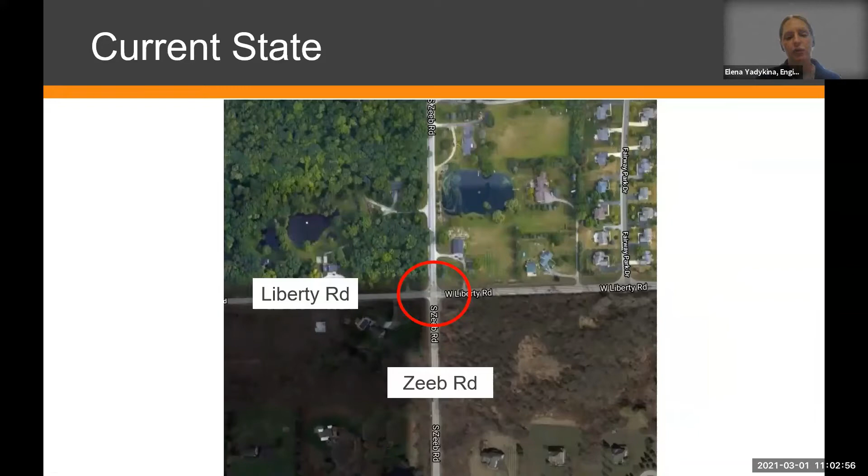We have a close-up for this intersection. Currently, it has 3 paved legs, and 1 leg is unpaved on the west side. It's a gravel road. And when we look at the ground, right now it's a 4-way stop control with a flashing beacon to warn people that a stop is required. As we can see even here, that location is busy and those volumes are increasing.

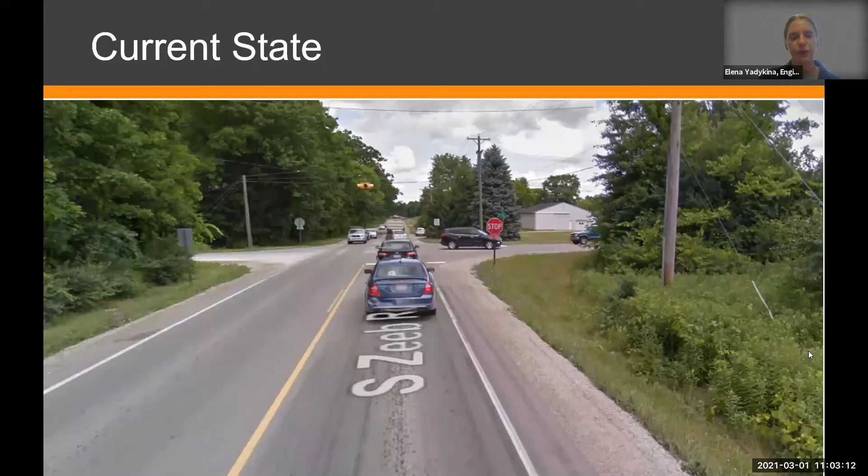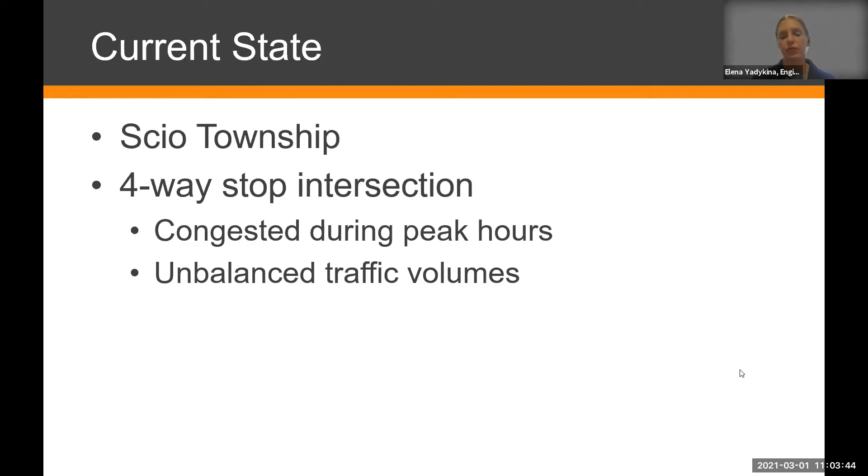When we talk about volumes, they continue to increase. Location is within Scio Township, and as I mentioned, it's a 4-way stop. We see congestion during peak hours, and we also see unbalanced volumes. We'll talk about it a little bit later, but at some locations we see approximately the same volumes on each leg. This location is different. Some movements are very heavy, while the rest of them are not so heavy. We'll talk about it later.

In terms of volumes, the ADT, or average daily traffic volumes, the 24-hour traffic volumes are very high. So we have thousands of vehicles traveling through that intersection every day. So these are 24-hour volumes. Zeeb Road has heavier traffic, but on Liberty also, we see 5,000 vehicles on the east leg of that intersection. So the volumes continue to grow, and with that, we see that this intersection needs to be improved.

We conducted a signal warrant analysis. That's something we do routinely for our intersections of primary roads that currently have stop control, 2-way or 4-way stop control. So we visit those intersections and we study, look at the volumes, delay, and crash history. We see if warrants are met for a traffic signal, and if they're met, to what degree. And we go back every few years to see how the situation is developing, if it's the same or the need for improvement is increasing.

So we studied the intersection of Zeeb and Liberty. We ran warrants, we looked at the volumes and all the other criteria, and we saw that even now, currently, the traffic signal warrants are met.

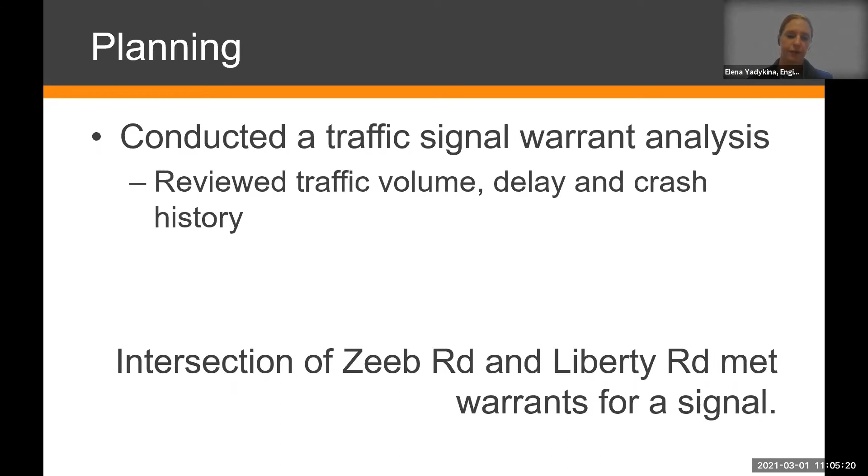Unfortunately, when we see those intersections, when those warrants are met, we can't go out and install an improvement next day, right? We need to plan. We need to think about funding, how to fund the projects, and typically those improvements are not cheap, a significant expense. We need to develop a strategy or plan what treatment a specific location will get.

Some locations will benefit from a traffic signal the most. Some other locations are more fitted for a roundabout. So we need to consider each location, because each location is unique. For the Zeeb and Liberty intersection, we also have some upcoming projects that will increase the traffic. It will impact this intersection.

We have a new residential development that is proposed to connect to Liberty Road on the east leg. We're also going to pave Zeeb Road to the south. This is the last segment that will connect Pleasant Lake Road to Ellsworth Road, and then provide a completely paved route for traffic to access Ann Arbor, Dexter, a north-south route to access I-94 and M14. So we definitely expect an increase of traffic due to those upcoming projects.

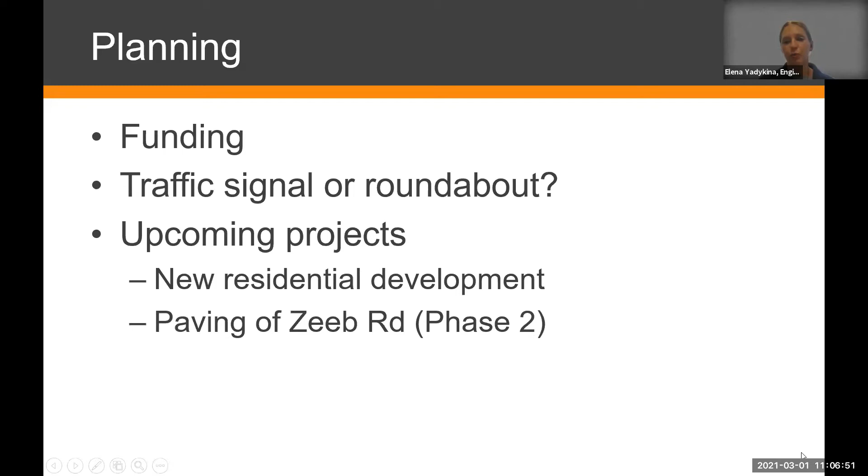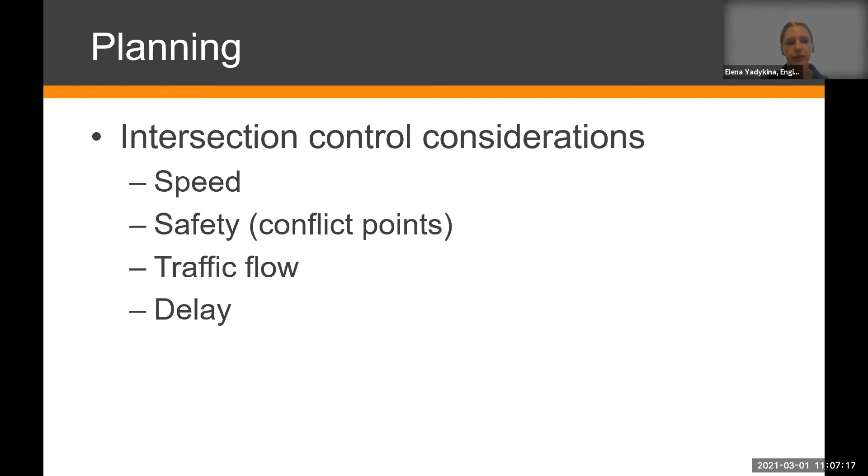With the roundabout option, a lot of these conflict points are taken out. They just don't exist. We have a total of 8 conflict points, and these are low speed and typically don't result in any serious injuries. So with those two options, when you compare conflict points, you compare 32 potential conflict points with 8. So this is a great benefit of roundabouts when you compare them to a traditional traffic signal.

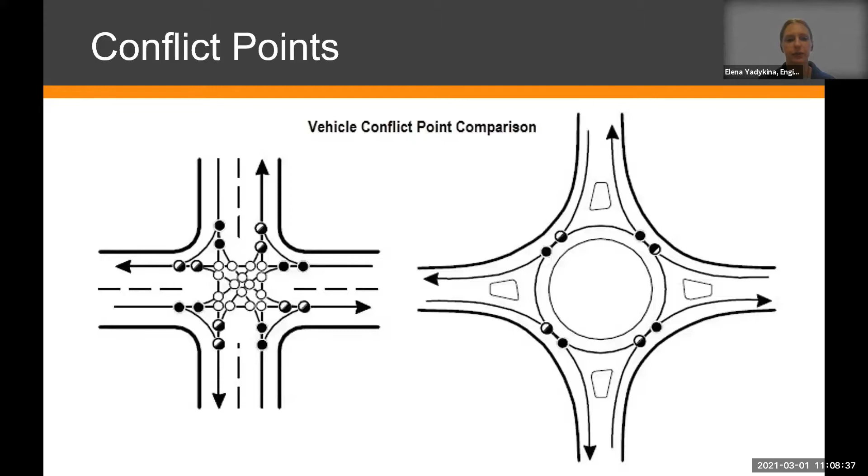I mentioned the unbalanced volumes at this intersection, and we think about these conflict points I just talked about. Here we emphasize the volumes. We have unbalanced volumes, a very heavy southbound left off Zeeb Road. We have a heavy westbound right off Liberty Road. Both these heavy movements are in conflict with the northbound traffic. That northbound traffic has a high percentage of heavy vehicles or trucks.

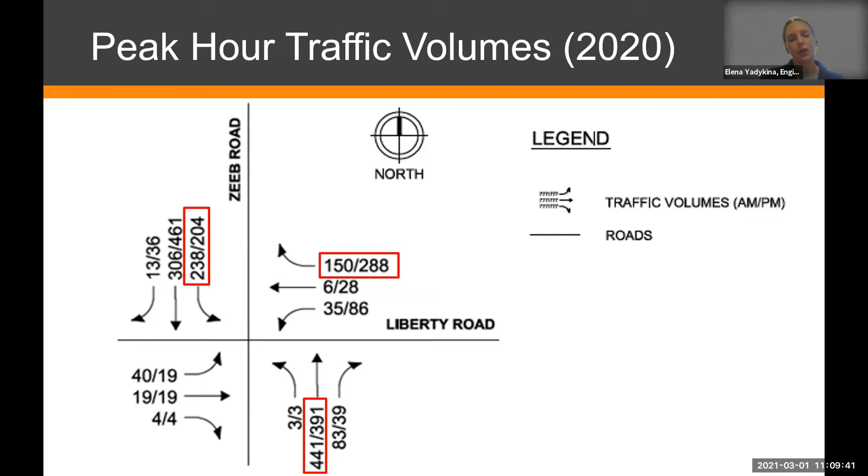So when we were analyzing the volumes and choosing a strategy for this location, we were very concerned about this potential situation with the volumes and high-speed traffic with trucks present at a high percentage. And we were considering all that. We looked at the traffic signal option for this location.

We sketched it up, and for this location, a traffic signal will not be just some poles and equipment. We typically provide left turn lanes. So at this location, we would be constructing left turn lanes on 3 legs out of 4. So it will still be major construction, some curb installation, and only after that will we be able to install poles and traffic signal equipment.

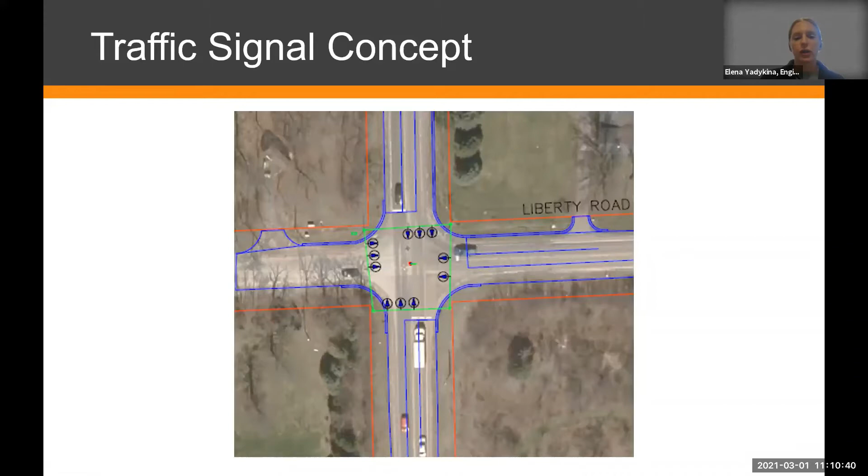So we sketched it out, we considered that option, but because of the volumes, those turning movements, the high percentage of heavy vehicles and the speeds, all that considered, we thought that it's probably not the best option for this location, because it might increase some crashes, such as rear end crashes. And overall, we came up with the preferred option for this location, which is a roundabout.

A roundabout solves the congestion issue, which we've already seen is going to grow with increased traffic. It promotes safety and also keeps speeds low. Our concern with the traditional traffic signal was if that truck might think, oh, I should be able to make that light, or maybe I'll go on yellow, or maybe I'll even run that red light, with high turning movements. That crash was a big concern.

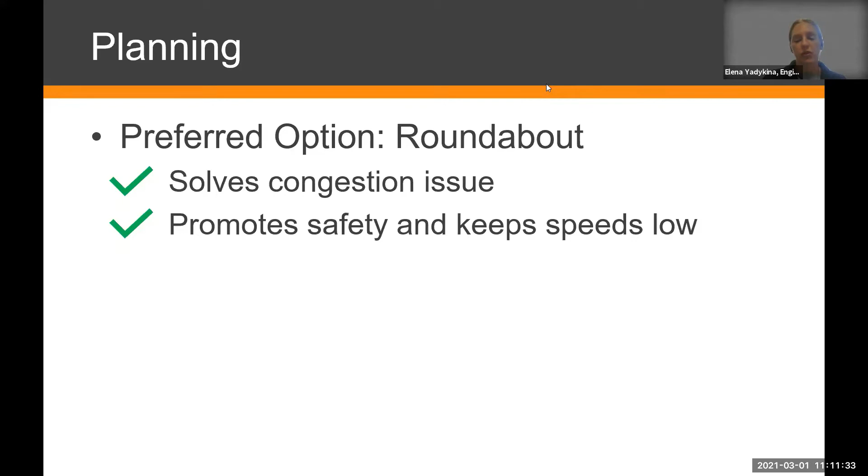This roundabout is very similar to the Wagner at Scio Church roundabout, and very similar to the Ann Arbor Saline at Textile roundabout. This one also has 1 leg unpaved, with similar volume, a very similar setting. We're working on design right now. We have some details to figure out, but this is the preferred option that we're moving forward with.

Our schedule: the first part of it is March, tree removal. Due to migratory bats, we have to remove trees until the end of March. So we are identifying the trees already, and we know which ones will have to be removed to accommodate the design and drainage. So this is the first part of the project.

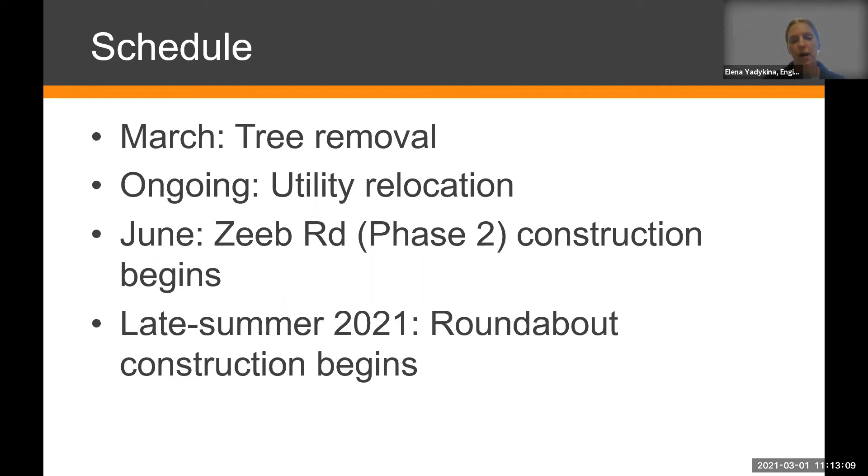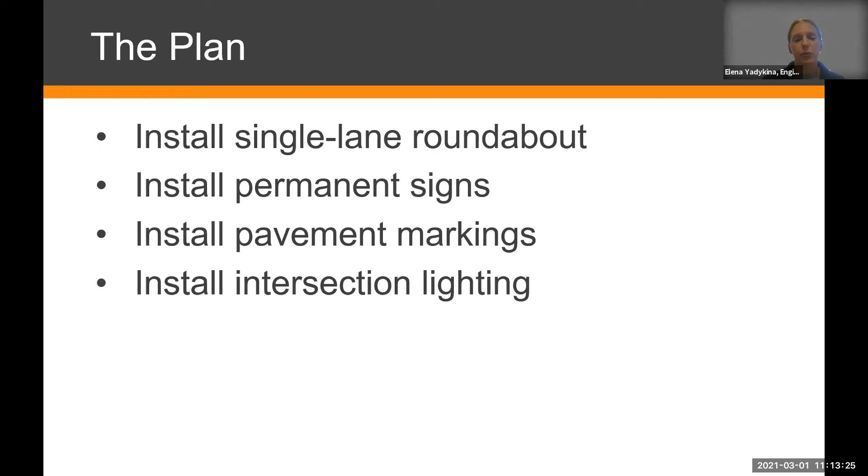We're also working with the utilities to identify the conflicts, and then it will be Zeeb Road Phase 2 construction, which I described, paving Zeeb Road between Ellsworth and Pleasant Lake Road. And the intersection work for the roundabout is planned for late summer. So our plan will be installing a single lane roundabout. It will come in with the pavement, permanent signs, pavement markings, and also some lighting installation for the roundabout.

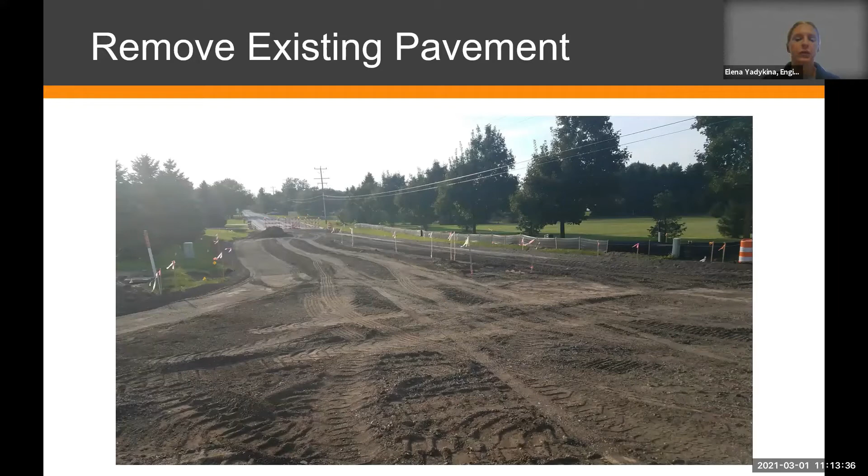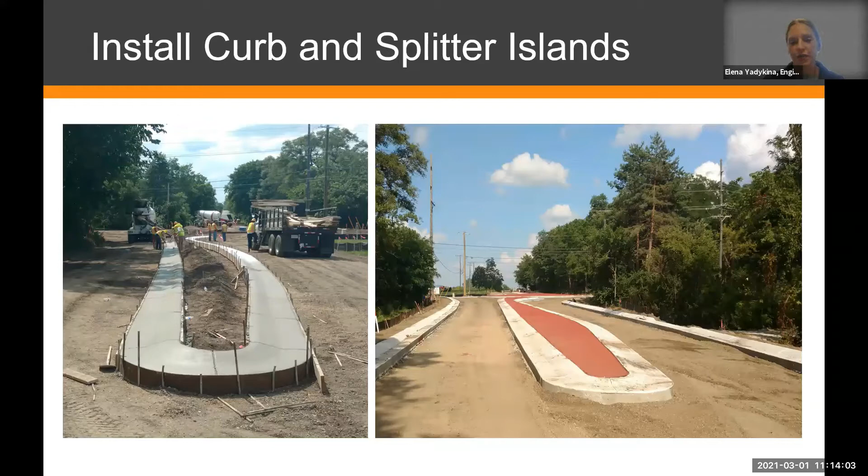So we'll start with the pavement removal. Then we'll set the forms for the splitter islands and center islands. The next step, we will pour the concrete for the islands and then wait until they gain sufficient strength. And we will fill the gaps with the stamped concrete. It's a red color to emphasize the islands, to emphasize the roundabout. So the center island also will be concrete. There will be no landscaping to make sure that we have sight distance for all approaches, and just to help with the long-term maintenance.

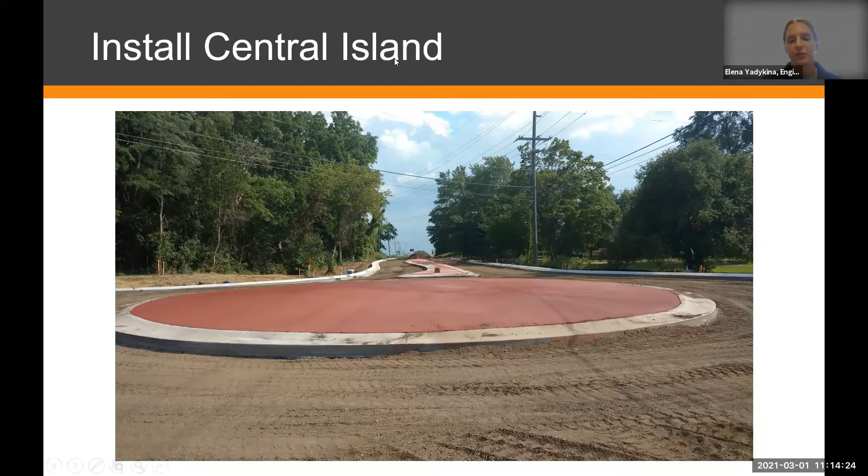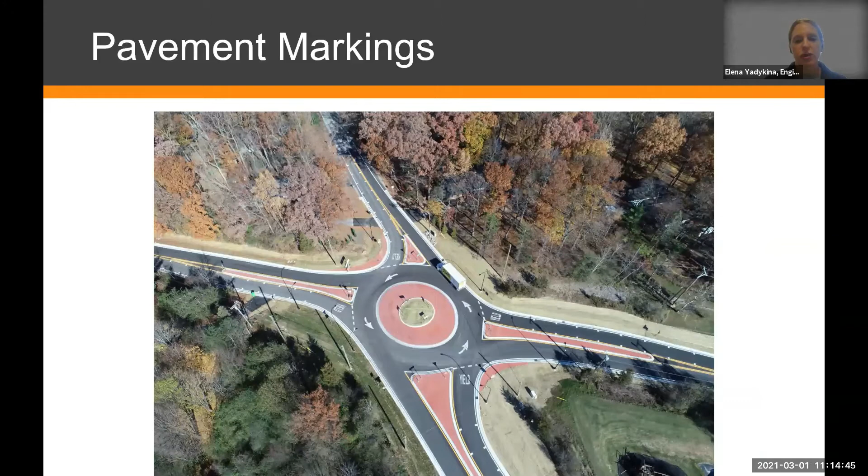We will pave the road, install permanent signs, and then we will install pavement markings. So the pavement markings will be yield and arrow pavement markings. It will be a set of standard pavement markings. You see the street lights here as well. And for the construction, the road will be closed for 6 to 8 weeks. There will be no through traffic allowed, no pedestrian traffic.

I think this year we will make sure to install more barricades to prevent any damage, because we don't want that concrete to be damaged where we would have to remove and replace and extend that closure to correct any damage. So we want the residents to be patient with us, but to let us complete the work, and we'll be making sure that proper signage is installed for all the traveling public to follow the detours.

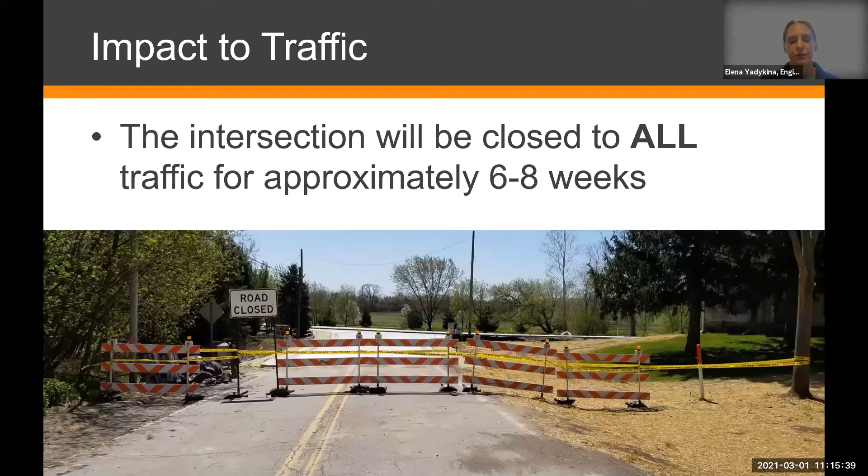So this is a detour. It will be posted using Scio Church Road, Wagner Road, Jackson Road, and Parker Road. All the local traffic for the residents who live right there will be maintained, but these are the detours for the traveling public to follow. We will be very busy. There's a lot of projects planned for this area.

We will have the Wagner Road safety project that will be replacement culverts south of Liberty. That work is planned for June, and that segment of the road will be closed. We have the Wagner at Waters intersection improvement. There will be installation of left turn lanes and a flashing beacon. That work is planned to start after July 5th, so that intersection will be closed. Then also, as I mentioned, we have Zeeb Road paving. So that road will be closed and there will be detours.

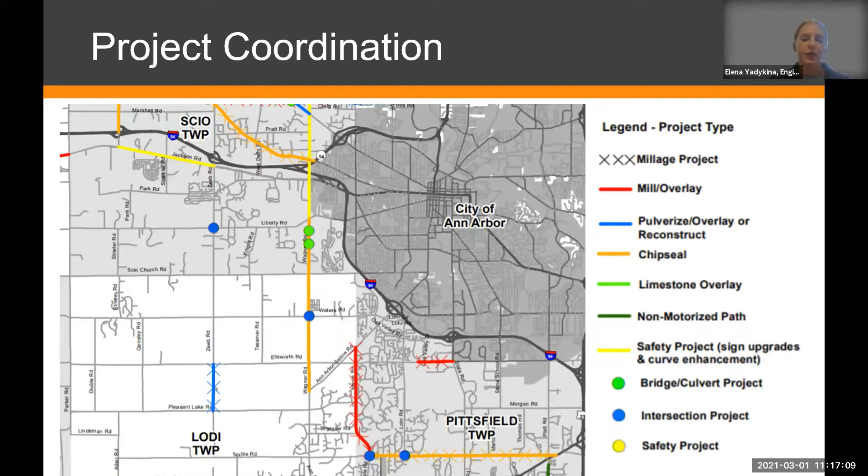So we'll do our best to coordinate all these efforts to make sure the detours are appropriate, and try our best to not overlap the detours. So we'll try to make sure we complete our work as scheduled while providing efficient routes for the traveling public. Mail delivery, trash pickup, all these services will be maintained, and if there is any lawn damage, that will be restored as part of the project as well.

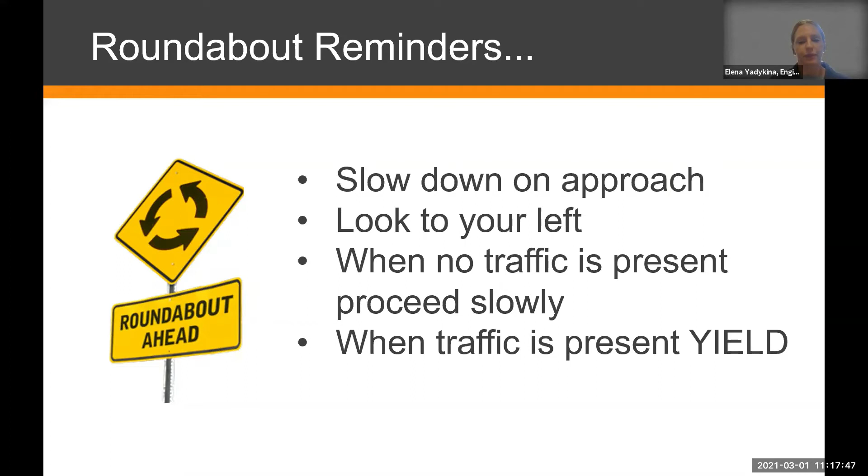And just to remind about roundabouts, you don't have to stop, but you should slow down, look to your left, and when no traffic is present, proceed slowly. And this is the contact information.

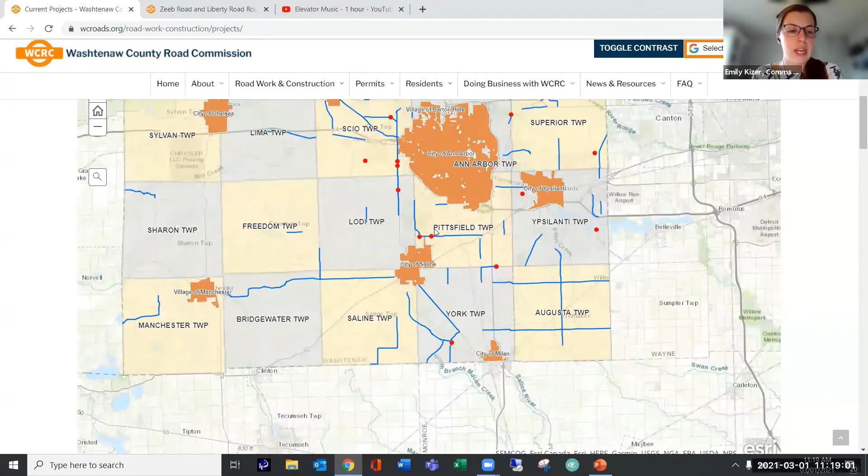So each of these road segments has a page associated with it. So if we find our Liberty at Zeeb Road page, and again, I'll include a link to this in the chat after I finish this demonstration, you can find this web page here. It's got some basic information. This is where I will add the meeting recording. We'll also put an FAQ up here in the next day or so as well. But you can find project updates here. Elena's contact information is here as well.

If you would like to receive project email updates about this, we will start doing updates throughout construction. And we'll provide photos and just let you know the progress that we're making. So you can subscribe to receive those updates by clicking this button right here. But then we'll post the same update right here to the website. So if you don't want the email update, you can always just visit this website. We'll share it on social media as well. But if you wanted to receive email updates, you would just click the subscribe to road updates, and then you fill out your information.

We do a lot of other email alerts as well. So if you're interested in other road work going on in Scio Township or Lodi Township, wherever you may reside, you can receive updates just on the township that you want. And then we've got these advisories by project. So you would want to subscribe to receive these for the intersection of Zeeb and Liberty Road if you're interested in these project updates. So we try to, again, put a lot of information out there. We will start to put updates about this project as we get closer to that closure; that will go up here. So there's a lot of information on there to share with you as the public.

Okay. So with that, we will move into the Q&A portion of the meeting here today. We've got a couple questions in chat and we will make sure that we get to these, but if you would like to ask a verbal question, you can do so if you're joining us from your computer or smartphone. We'd ask that you raise your hand virtually by clicking the participants button and then the raise hand button. That participants button should be either at the top of your screen, since I'm screen sharing you may have to hover over the top, or it's at the bottom. It depends on what computer you're accessing this with. Then just raise that hand, and we will unmute people one at a time.

If you are joining us from your touch-tone phone today, you can raise your hand virtually by dialing *9 to notify us that you'd like to ask a question. And again, you can always ask a question in chat. I know we've got a few here already, so we can start with those. But if you want to raise your hand, now is the time. Okay, looks like we have our first question with a raised hand. So we'll go back and forth between raised hand and chat. So we've got Paul first. You should be able to unmute yourself, Paul. Yeah, can you hear me? We can, yeah, go ahead with your question.

So I'm a resident that lives about 0.8 miles west of Zeeb Road in a private development on Stag's Leap Lane. And west of us on Liberty Road, there's a low area that frequently is covered with water over the road. There's a sign announcing it. Happens year round, happens more in spring, but it can happen anytime after a rain where the road is not passable. So that essentially traps all of the residents between Zeeb Road and the water over the road, which is about a mile stretch.

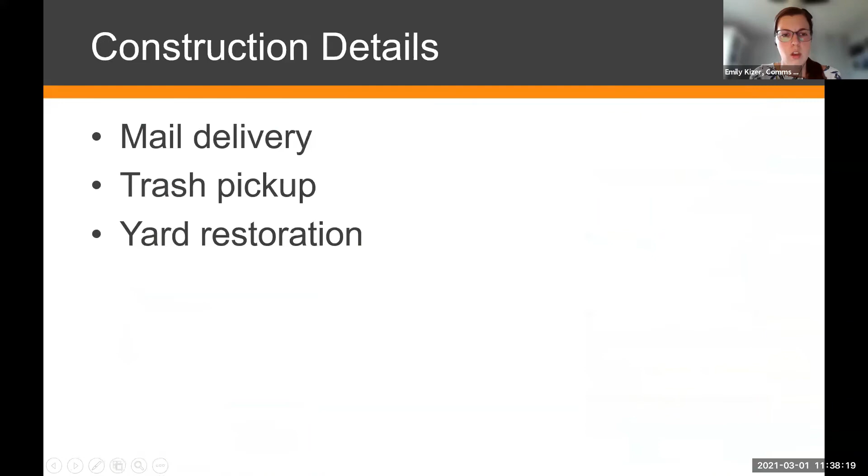And then we had another question about the detour. Ron's wondering, what are the specific details and enforcement to make sure that traffic is honoring those routes. So Elena, do you want to talk a little bit about what that means with enforcement? And we've got another question here about how to prevent people from going through like Polo Fields and other neighborhoods. Do you want to talk a little bit about that?

So I know for the Polo Fields, we got the question from the homeowners association, and we will be putting in the signs for local traffic only for those entrances. There are 2 entrances off Liberty Road, and there's 1 entrance at Polo Fields Drive off Zeeb Road. So already we talked about it. That's something we will be accommodating. The Sheriff's Department will be aware of the project. We cannot guarantee their presence, but they will be aware of this construction going on as well.

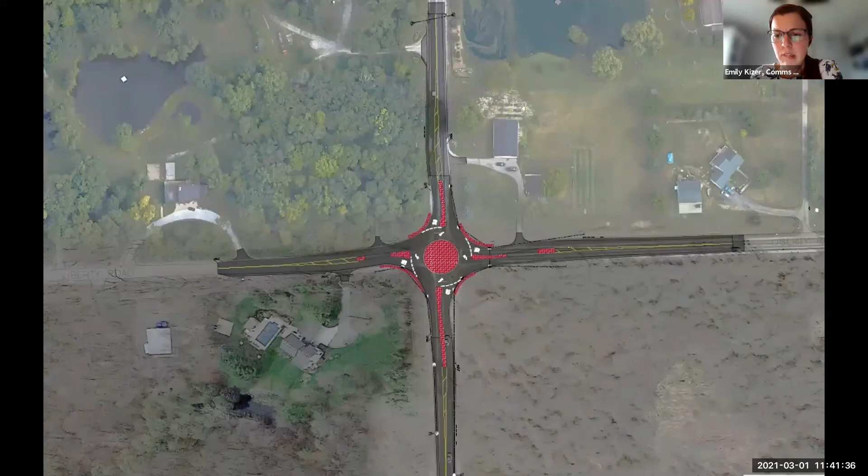Yeah, I mean, we're placing those signs to hopefully deter traffic. Certainly, if you see activity where somebody is violating speed or what have you, you can call the Sheriff's Department. We'll be in contact with them. It would help them knowing the time of day, and like we said, we'll work with them, but all we can do is monitor and try to adjust when the time comes.

I just wanted to emphasize that the detour will be posted away from the Polo Fields or that intersection. So if you look at the detour route, it will be stating that road is closed, half a mile away from the intersection. So that's where they're posted, and it's in all directions. So I believe a lot of the traveling public will be aware of the construction and will be using those detours. So it will not be posted right at the subdivision. It will be posted ahead of time. Right. There'll be a lot of advance signage to warn of the road closure. Yeah, that's a great point.

Thanks, Elena. And Ron also brought up the speed humps. We will not be installing temporary speed humps within the neighborhood. We don't have a solution for that, or one that's acceptable for our maintenance vehicles, one that is an approved device for our public roads. And we were talking about speed limits being a whole other thing. So speed humps are a whole other thing as well.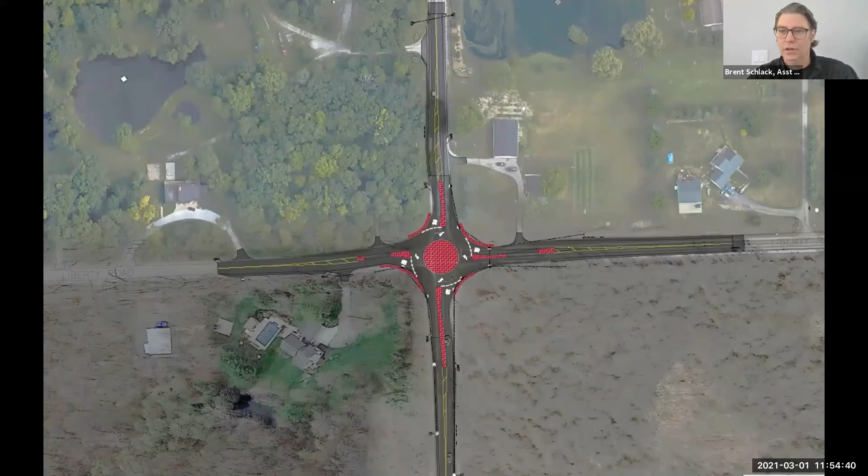Yeah, because generally we don't have a way to ask for exceptions to the detour, right? I know we are all guilty of it, but when you see that road closure sign, you think, ooh, I wonder if I can get around. I wonder if this applies to me. In almost every case, those road closure signs apply to you. And so that's the message that we'd like you to walk away with today, is that this road is going to be closed. We're going to do it as quickly as we can, but it is going to be closed.

We will work with emergency services. We'll come up with a plan if there is flooding at Liberty. But in most cases, those road signs apply to you, and this road will be closed. This intersection will be closed while we do this. And we do that to protect you as the motoring public, and also to protect our workers. We've had multiple incidents over the last year where people have entered work zones. We unfortunately had 2 fatalities, not of our workforce, but contractors on I-94 this last year were killed when someone entered the work zone. So we really need people to abide by these signs.

So again, Carolyn, if you have a special circumstance that you want to learn more about, we've got Elena's contact information here. We'd encourage you to contact her and we can try to find out more information, but there isn't a process to apply for an exception to the detour.

So it looks like I've got one more question here in chat. Benjamin says he's very excited for this project, which is great. We are too. And he is asking about preventing cut-through traffic into the Polo Fields neighborhood. I know we've talked a lot about that. Those are public roads. So we're going to have signs that say local traffic only, but those are only advisory signs. And we'll also have a posted detour, but the roads through Polo Fields are public roads, so people are allowed to use them. They need to follow all the rules and laws applicable to that. But we are going to have those local traffic only signs at the front of the intersection.